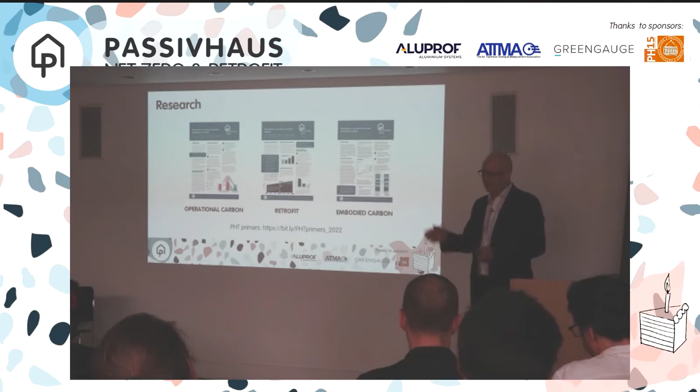This year has just been a bit mad. I don't know what you've all been like, but we have been so busy - it's been absolutely crazy. I've just picked out a couple of highlights from what we've been doing. These are 3 primers we've released in the last 6 months on operational carbon, on retrofit, and on embodied carbon. I haven't mentioned all the research work we're doing on specific detailing around steel frame, for example, the RIBA plan of works and how Passivhaus fits within that. Thermal bypass - we've got specific technical papers on all of those things running at the minute. It's just kind of relentless at the moment.

To follow on from that, in the autumn we'll be running large and complex buildings - so how does Passivhaus apply to large and complex buildings rather than the smaller scale things that many people start with. And then, of course, the UK Passivhaus Conference, which will hopefully return this autumn. That's also going to be a hybrid event.

So this event here today is a bit of a practice, because the conference normally gets 400 or 500 people coming to it, and that's going to be hybrid as well. Actually, it's a bit of a bonus this year in that the hybrid will allow us to hold the event outside the core cities. So we're going to Exeter for our conference this year - we're going to visit the St. Sidwell's Leisure Centre, the Passivhaus Leisure Centre. There will be site visits and training around that too, on the site.

But it's also going to be open to everybody online as well. So because we can do the hybrid thing, we think it's okay to go outside these very central locations of London, Birmingham and Leeds. So anyway, that's a good thing.

There's lots more I haven't mentioned on the education side as well. We're working with RIBA, for example, on building Passivhaus into all of their training for students. How would that work with architecture students across the country? We're looking at that at the minute, looking at how we build it into NVQs levels 4, 5 and 6, and how we get Passivhaus converted into that, plus detailed technical seminars throughout, as well as all the CEPH people going through the training, which we sometimes forget until they come and meet us.

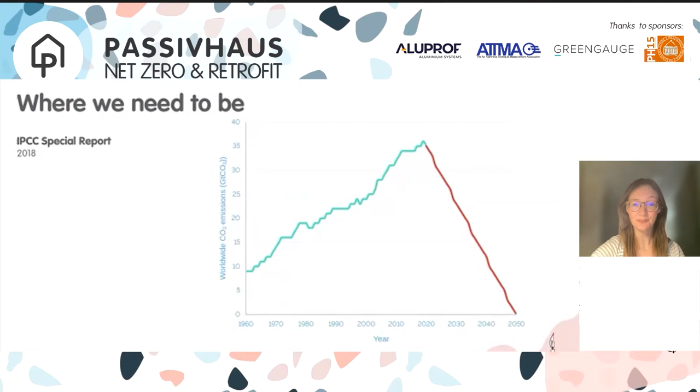Next slide, please. So how are we getting on with this steep downward trajectory that we need to be on? Well, if we look at the reality of this - this is the greenhouse gas emissions from our buildings - we can see, shockingly, there has been no discernible improvement over the last decade.

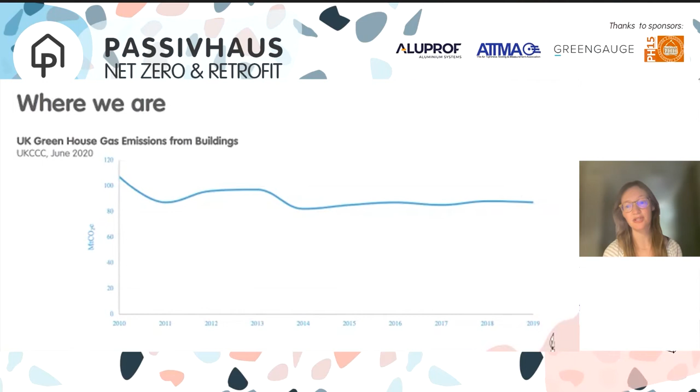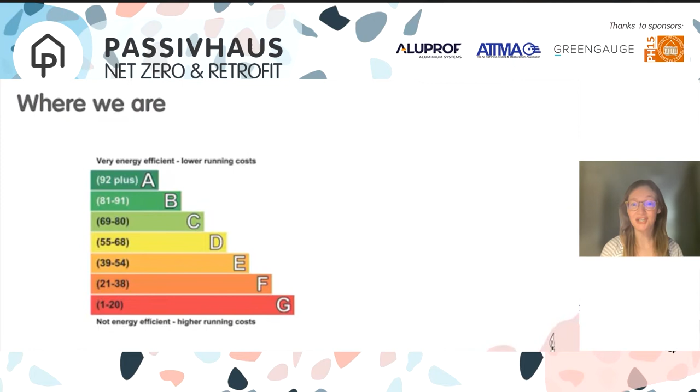But surely it's not all bad news - our devolved governments around the UK keep making incremental improvements to our regulations, so our buildings are becoming more sustainable. Well, not necessarily. This graph neatly illustrates the futility of using the building regulation EPC rating as a measure of energy efficiency. A better score does not necessarily deliver that better efficiency that it implies. We need a better methodology to deliver the improvements that we must make, and I'm going to make the case today for that to be Passivhaus.

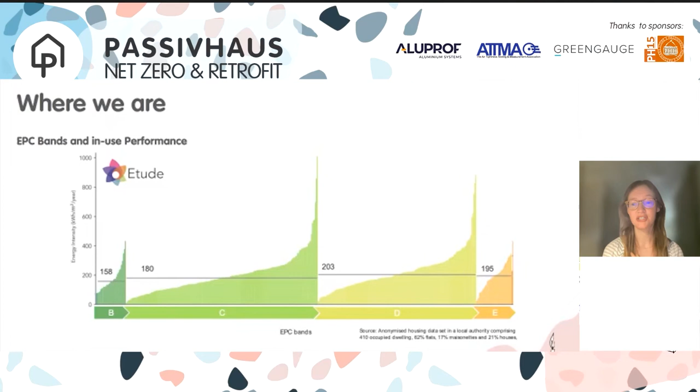So the kind of slow incremental improvements are not going to get us to where we need to be. The fundamental principle for Passivhaus is to reduce the heat losses so significantly that the building's heating demand can be largely met by the sun, the people, and the internal machinery in a building, with just a small contribution from the heating system. And of course, Passivhaus effectively eliminates the performance gap.

Importantly, this standard is for today, but it's also for the future. The same energy metrics have been in use more or less unchanged since the 1990s, such as the 15 kilowatt hours per meter squared per annum limit for space heating. This can be used to deliver to both the RIBA 2030 challenge, and it's also the space heating limit recommendation in the LETI Climate Emergency Design Guide. So there's clear cross-industry backing for Passivhaus levels of performance, and a recognition that this is the level we need to be at to get to net zero.

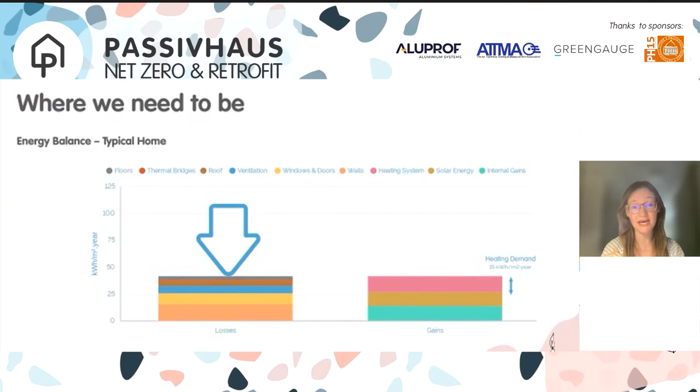Passivhaus is often assumed to be primarily an energy standard, as it does that part so well. And whilst it's true that Passivhaus delivers very low energy buildings, and helps us address the climate emergency, the standard also delivers much more. Benefits can be observed in terms of things like health and well-being, people performance, finance, as well as those broader societal effects.

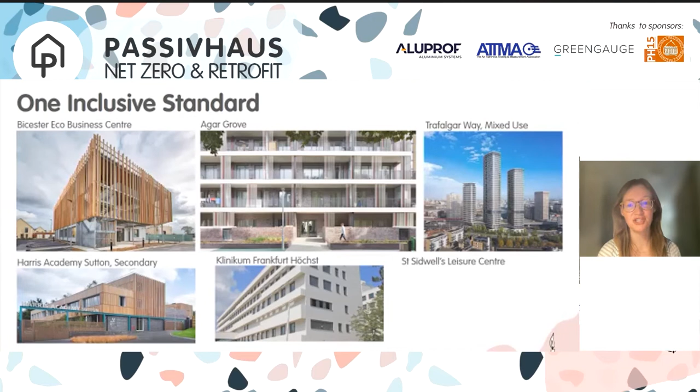So Passivhaus is this international tool. It's backed by 30 years of evidence. It provides us with a range of approaches to deliver new and existing buildings which are optimized for net zero. And this really is no time to reinvent the wheel. The tools we need to deliver on our climate pledges exist today, so we really must just get to work. The Passivhaus standard provides the solutions that we need in the UK to the hurdles that we have as a country of getting to net zero as a nation.

And of course, Passivhaus is no longer this niche standard for small one-off projects. There are over 7,000 units currently under development around the country. The images on this slide are just to give a flavour of some of the completed and projects underway around the country, including a range of building typologies from business centres and universities to swimming pools.

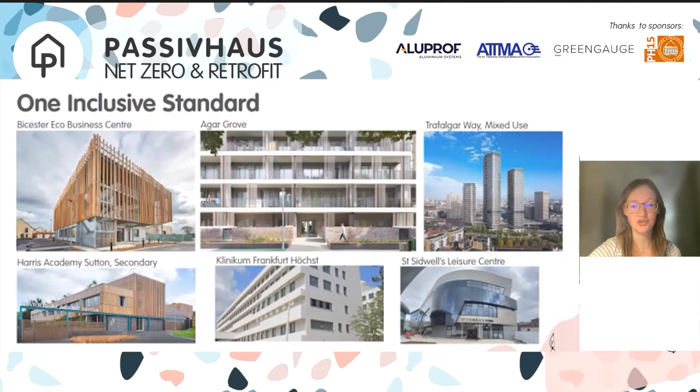John just showed you this, but if you want to see how Passivhaus can fit in with your net zero ambitions, we have this set of easy to digest primers covering, as John mentioned, Passivhaus and operational carbon, Passivhaus and embodied carbon, and Passivhaus and retrofit.

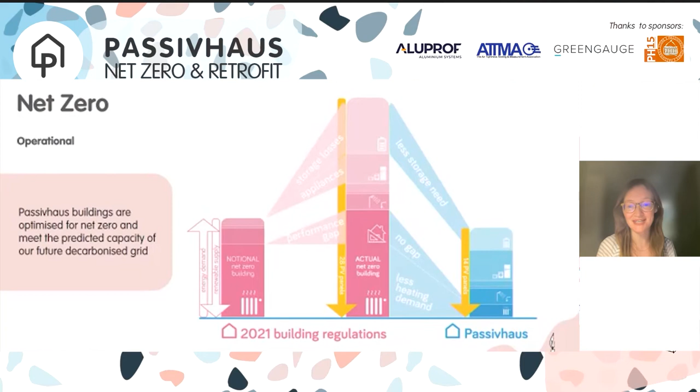A Passivhaus will have significantly lower heating bills than a typical new build equivalent.

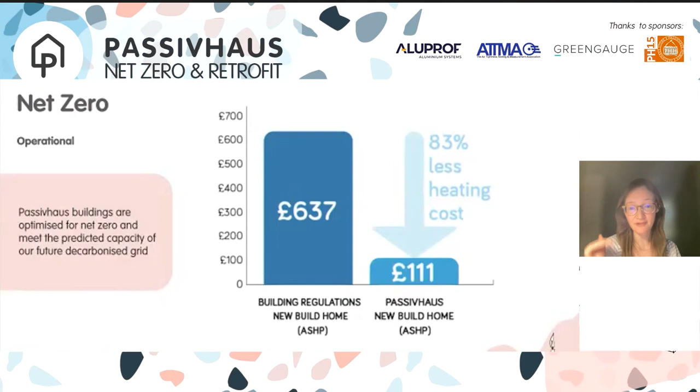In all the discussions we have as a sector around decarbonisation, it's really important that we do not lose sight of the huge number of people in UK homes living in fuel poverty, and the impact decarbonisation will have on those most vulnerable members of our society. Even before the current energy price crisis, over 4 million UK homes were living in fuel poverty. So it's critical that as we switch to decarbonised heating, we do it in a way that does not exacerbate this problem, by focusing on demand reduction and bill reduction as part of the solution.

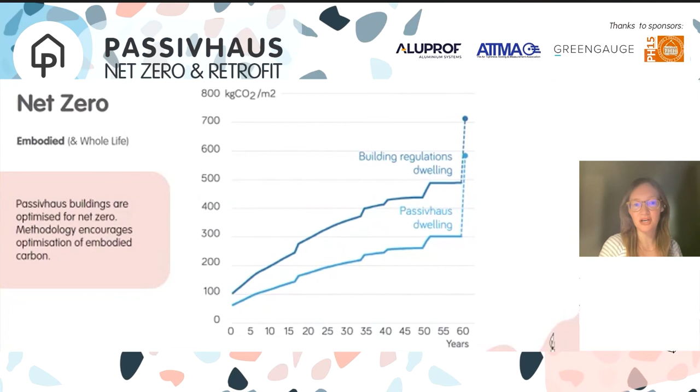You often hear queries like, what about the windows? But our analysis shows that extra pane of glass is insignificant compared to much larger embodied carbon concerns around structure and services.

Next slide, my second to last. I'm not actually touching on retrofit—it's in the second session—but it's so important to think holistically about our net zero future, not least to remind ourselves how important it is that new buildings do not add to the future retrofit challenge, as this is already plenty big enough. If we build today to the minimum building regulations, we're just creating a new raft of buildings to retrofit, at huge monetary costs to our clients and huge embodied carbon costs to the planet.

To get to net zero, we need to radically reduce energy demand and drive efficiency, which is what Passivhaus does. We cannot simply generate more zero carbon energy supply, due to the limitations we've just seen in the national grid—overall grid capacity, the peak load issue, and the demands for renewable energy from other sectors.

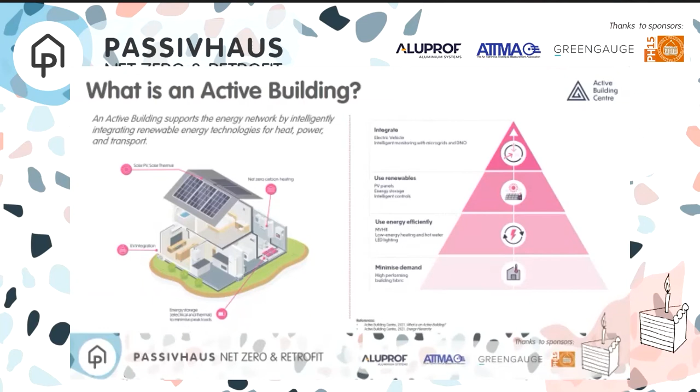So I'm going to present some of our case studies on what impact a net zero building can have on people and the climate.

So one of the case studies here is Marleigh, which is a private home development in Cambridgeshire. As part of the development, it's 1,300 new homes, private homes, in collaboration with Hill Marshall and PTE Architects. As a planning condition, the council required 5 pilot homes as part of phase 1. Active Building Centre was involved at RIBA stage 2, where we supported the architects in establishing how they can approach Active Building Centre principles and include those in their building.

We supported with the feasibility study of the 5 active homes, and we helped them in procurement of the different technologies needed to deliver an active home.

You can see an impact here of what it does for us. A standard build is one where you build to the current Part L regulations. A baseline design is, since it has 1,300 homes, the rest of the homes have to be built to a certain standard, which is still better because Cambridge Council has their own regulations. But if you build it to active home standards, it's a 64% improvement on a standard build - it's not net zero, but when you're working with a big house builder, you have certain challenges which we are still struggling to collaborate on and deliver those buildings.

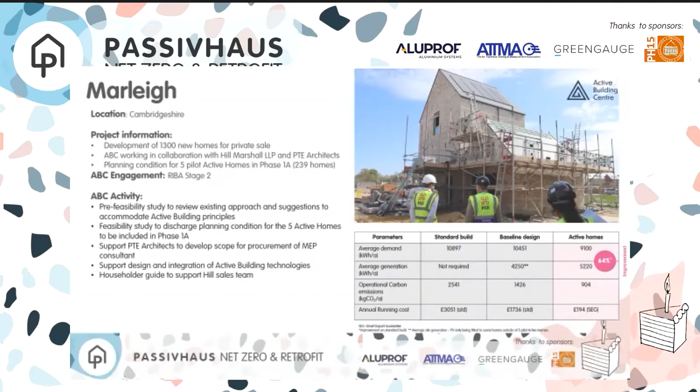But then there's another difference in the social housing example, working with Flintshire County Council in Wales. Here we were involved from a very early stage, and we were able to do dynamic simulation modeling at RIBA stage 2. When the client came to us, they just had a concept plan, so the impact we could make from an early stage was great, which shows in our results, even though it's still at planning stage.

It shows that if you do the right things from the beginning - reducing the demand, changing the orientation, and maximizing the PV generation on the roof - it can get down to 124%. Because it's whole social housing, there's no need for air source heat pumps, since we followed the passive house approach. So these are going to be certified passive houses.

The heating demand for the homes is nearly 5 to 7 days when they really need to turn on the heating. So we did not need any air source heat pumps, and they're going to meet that with just infrared heating. That shows on the operational carbon emissions, which is negative, better than net zero.

That's what we hope they're going to be. We are going to take more detailed analysis at later stages, but still at planning, we were able to do dynamic modeling. And the running cost is -100 because the users are able to share and exchange with the grid. That shows what an impact you can make on a building if at the right stage with the right design and the right approach.

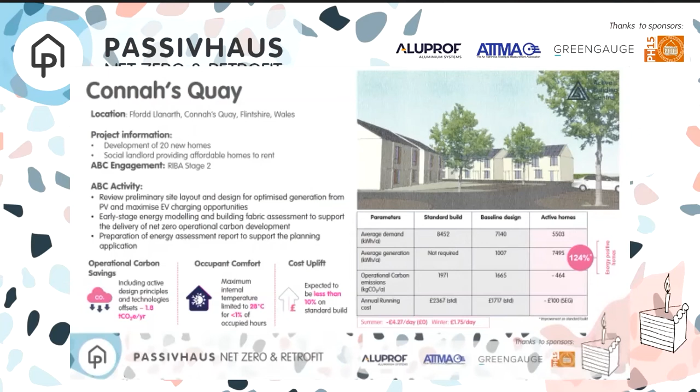And this approach not only applies to domestic buildings. This is another example of a non-domestic building where we are applying the active building approach to industrial buildings, in collaboration with Carmarthenshire Council and Welsh Government, where we are building 3 non-domestic industrial and office blocks.

The target here was achieving RIBA 2030 climate challenge. And it has been a challenging project. I wouldn't say it wasn't, but we are getting there.

The highlight for this project was, since this building is going to be monitored 5 years after it's been constructed, the contractors are going to be held accountable for what they've delivered. So that was the driving force behind it, because we can hold them accountable for what they have delivered.

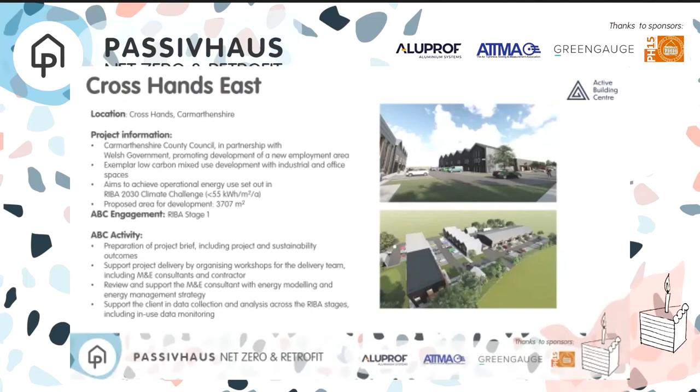Concludingly, this is what we work on at Active Building Center. It's comfort, carbon, and cost. It's a balancing act which you cannot achieve all at once - to achieve one, you cannot compromise the other.

So this example shows the overheating analysis that we did for a non-active home. The building was overheating and the maximum temperature was reaching about 40 degrees in summers. That's what a standard UK Part L regulation build will do, because you're just supposed to comply with SAP calculations. That goes to highlight that we are not doing enough at this stage.

Even with the new Part O overheating assessments, it's still just for non-domestic buildings that you need to do dynamic simulation modeling. You don't have to do any sort of dynamic modeling for residential buildings, and this is a residential building. So there's a very high risk of potential overheating in those homes with future weather conditions, and you know that's going to be there.

You're going to have extreme weather conditions in the future, so we need to future-proof our buildings. You can see the impact that we can have. This is the calculation done for a standard 3-bed home of 74 square meters in the UK. If you follow a non-active home approach, the Marleigh pilot approach, where we had challenges and weren't able to maximize the roof generation, but in Connah's Quay, where we were able to maximize the roof generation and meet the demand, there was a 103% improvement on standard build.

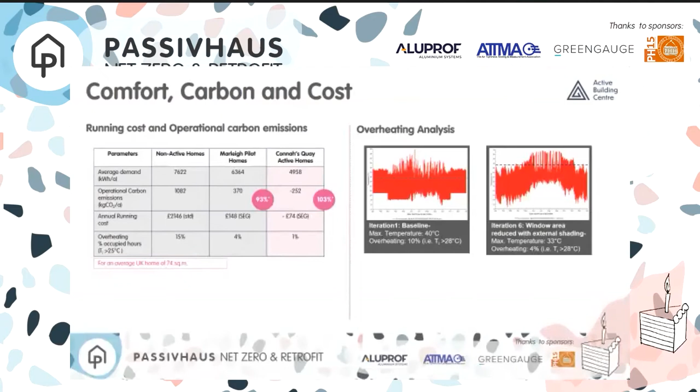Great, thank you, Pragya. So we've heard about efficiency as the first renewable, and then we've heard about on-site, on-building renewables. And now we've got David Adams, who's going to tell us about what some of the major house builders are doing or hoping to do on this approach. So David.

Thank you, John. I guess you're probably sat there going, oh my goodness, what's a main house builder going to say after that? Fantastic presentations, really appreciated. This is my second hybrid event, and by the looks of it, the slides work. Just to be safe on this one, I thought I'd cut out the middleman and not have any slides, because I was told after my presentation last time, no one could see the slides, they'd all wiped out. So there are no slides, you've just got me.

I'm kind of notionally talking from a Future Homes Hub perspective, more from my own personal perspective, but I am working with them. From my background, I used to work and set up the Zero Carbon Hub. I was keen to engage, but do not quote me as this is the house builder view if you'd like me to live.

I'm also conscious that, you know, you guys do a fantastic job. You really are pushing the envelope, and you see me as a main house builder. And the main house builders see me as a green person pushing, so you both hate me.

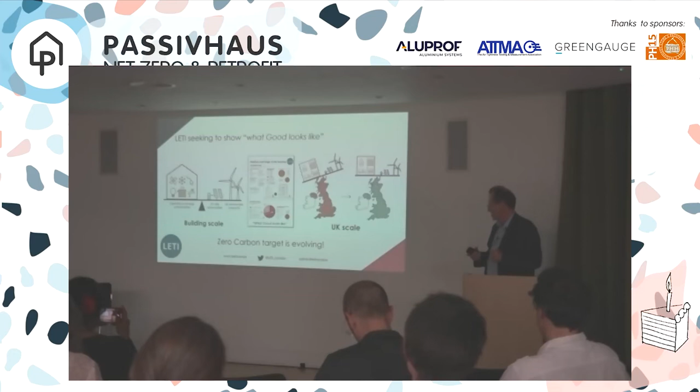What we realized pretty early on was that zero carbon is changing. I was involved in the BedZED project 25 years ago, and we were on the far left, building level zero carbon. We're now working at a UK scale - we heard this implied earlier on in that debate - and we have transport, industry and a whole set of other things to be involved. What I want to do is give you a little heads up as to how that potentially changes where we need to go.

The climate emergency guide we produced tried to set targets as to what was appropriate, looking at top down and bottom up - how much renewables, green energy we could produce, and divvy that up between industry, transport, buildings and so on. Lo and behold, it came remarkably close to Passive House for new build, but there wasn't one mention of Passive House in the document because we're trying to be impartial. But that is the kind of level we're looking at - not least of all, working from the bottom up is pragmatic. And as I mentioned to someone earlier, you also have a 20% cost benefit because there's no VAT. Therefore, why aren't we doing it?

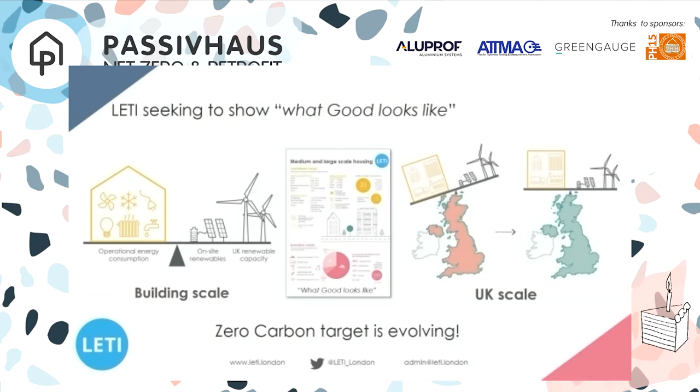Retrofit, on the other hand, is a different ballgame. Retrofit Part 1, for which we're very grateful for people who have come out supporting it, looked at what best practice was, looked at processes, looked at things you have to consider, the need to look at it holistically and so forth. But we knew when we were doing it, we were circumnavigating certain difficult issues. So although we've set a standard, we've established a best practice which loosely speaking aligns with AECB at a certain level, but is very clear on what you need to do to try and achieve that.

So it becomes less of a black box. And for that reason, we're beginning to see LETI guidance coming into planning policy as a clearer direction because it appeals more to a wider audience. But those elephants in the room—it did not align with where the UK was going at a top-down level.

The Committee on Climate Change, now renamed the Climate Change Committee, in their sixth carbon budget, state the energy efficiency needed of our total building stock is 12%. That's it, nothing else. It's far cheaper to build those wind turbines mentioned earlier, and that's reflected in their diagram on the right here. The energy efficiency is that much, and heat pumps, which are using that grid and renewable supply, are picking up the lion's share.

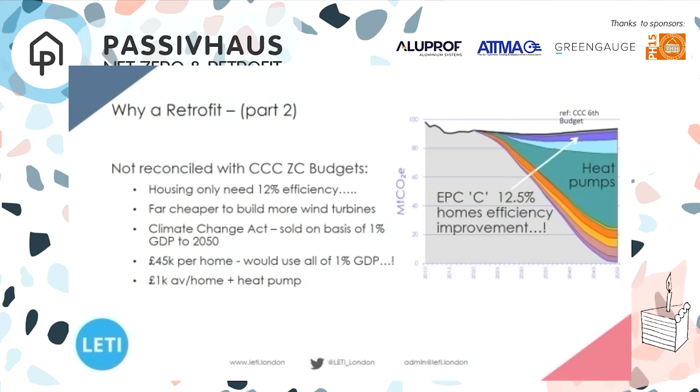Our best case study in part 1 was 60,000. It doesn't work. In fact, the CCC has £1,000 per home on average, plus a heat pump. I paraphrase, but that's basically what our research has identified.

So we then started at this retrofit Mark II: how many, how deep, and for what cost? The nitty questions. So we wanted to identify shortfalls in the straw man which the CCC has put up—as mentioned earlier, issues of fuel poverty, top down, meeting the cost limits and so on, PAS 2035 compliant and occupant responsive, because we didn't feel a lot of what was out there was responding to what occupants were telling us were their priorities.

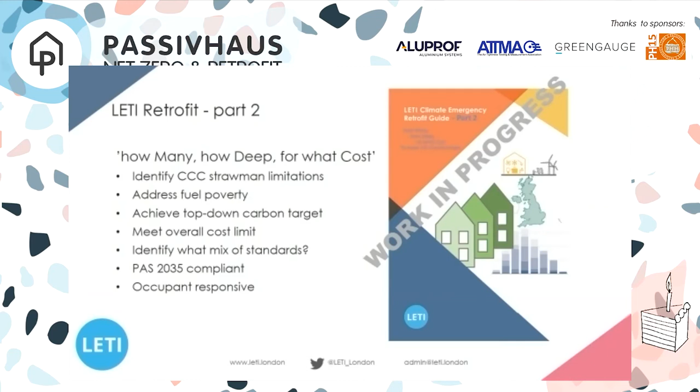This is only a draft, but the image here is significant. There are different shades within the answer.

I'm not going to go through this, but if you're trying to manage a work stream of 80 people, you're looking at CCC interrogation, fabric, systems, cost, trying to integrate those, a stock model which John Palmer put together for us previously at Passivhaus Trust, how to get to zero carbon for zero cost by 2050, and the social aspects. Try managing that process.

This is roughly where we think the numbers start to come out. Enerphit, and I'd put Energiesprong roughly in the same kind of level, although it's not judged in the same way because it's a cost model, between 10 and 20% of the market. I'll be interested in whether you think you can ramp up to that level, because that would feed back into that process. I'm skeptical.

LETI best practice, about 25%. Historical buildings, the remainder—we think we can shrink that to about 1% or so of the market. And the remainder, we think we need a new standard, and we're calling it LETI Basic.

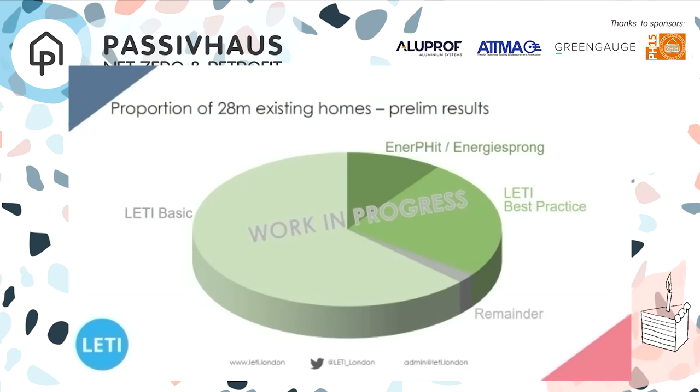I'll go into that in a little bit of depth, because I know it might grate with some of you in this room. In essence, we've taken feedback from people—certainly I had an involvement in the Green Deal and so forth. Single point of contact: we don't want dozens of people turning up. Keeping the front facade: we made an early decision we weren't going to touch the front facade. And what we did was we took this archetype far deeper than we did in retrofit 1, because we wanted to apply an awful lot of extra thinking that would not normally get applied to an individual dwelling.

So, front facade, looking at lack of space. Forget that hot water cylinder for an air handling unit for the air source heat pump—it doesn't work. And various other things within that.

We came up with a way of doing LETI Basic, and then a way of progressing, if you wish to, onto higher standards with the various different levels we're looking at for costs. I'll come to that in a moment.

I'm not going to go through this in detail, but we are going for MVHR, and I'll offer you just a little taster. If you go for 80% efficiency as opposed to 90 or 92%, the price comes down from 1,600 quid on a good day down to 450 quid. It's cheaper than demand-controlled extract ventilation with those trickle ventilators.

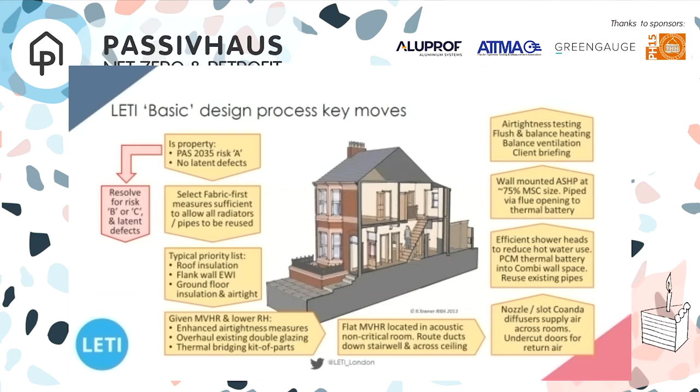There's also other things to do, how we want to replace the boiler with the thermal store, phase change thermal store. You want to retain all the insulation, the heating system. That means fabric first. The objective is make sure you don't need to touch the heating system, other than replace the middle of it.

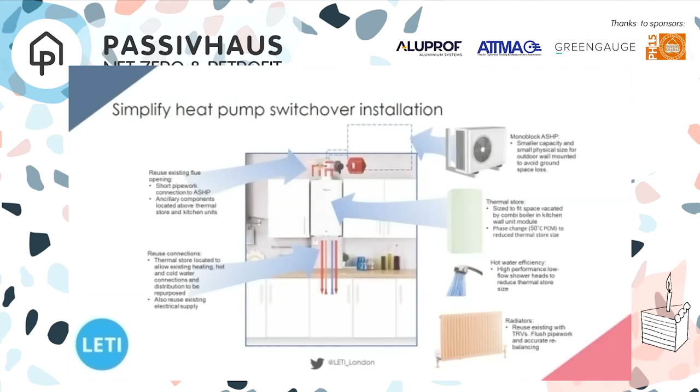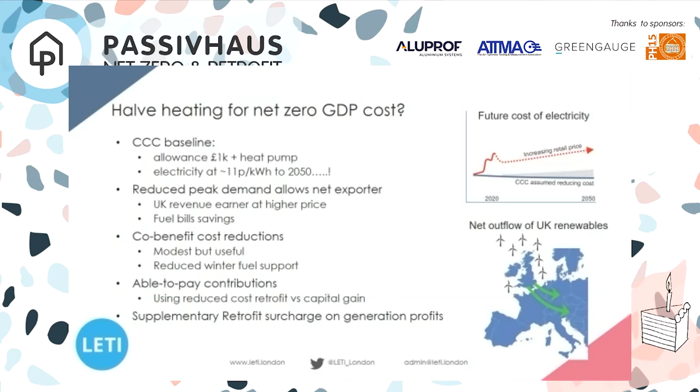And there's various other things to finish. We're also looking at a supplementary retrofit surcharge on generation profits. This is exactly the mechanism which happened for gas in the North Sea. It gushed out of the ground, and they sold it at world prices, so the government then took a slice of profit. We won't be able to use all of that because Treasury will be looking to replace their tax on petrol and things like that, but we believe there is something there we ought to be looking at because of fuel poverty and so forth. That's a snapshot.

I'll leave you with a summary. We're looking at roughly halving heat demand at zero extra cost, a mix of different standards. And yes, we'll need some new products and a new way of doing things when it comes to interventions in your typical house. And by the way, there's a Retrofit for the Future guide coming for non-domestic shortly. Watch this space. Thank you.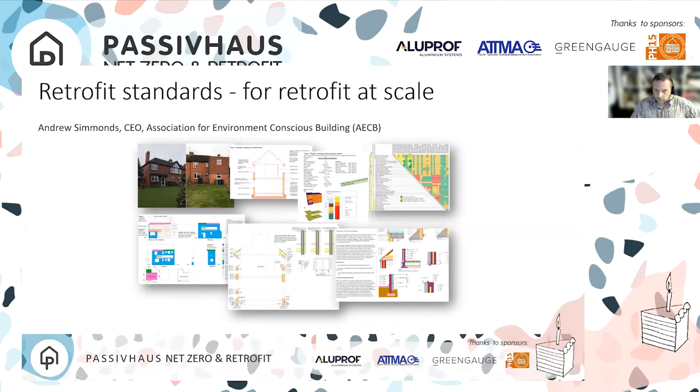We've got a small group, that's Alan Clark, Sarah Price, Gervais Manguano of Waxwing Energy, Mark Siddle, and myself. We basically convened this group because we wanted to rise to the challenge of those people who've been criticising those people who they perceived as over promoting the benefits of deep retrofit, particularly when it comes to understanding whole life carbon and so on. So we rose to that challenge and took on a bit of research.

A bit of background, AECB's got 1,800 members at the moment, which is good. It's going up. And we've got quite a few students joining as well, which is always good. We've developed 5 standards to date. We have the building standard, which is for new build. This is a self-certification system based on the Low Energy Buildings database. We have the retrofit standard, and there's information on the website on that. Where I've put full fabric retrofit, that really just describes what the current standard is. And what I'll be talking about in the next few slides is what we might call a heat pump retrofit or a light retrofit.

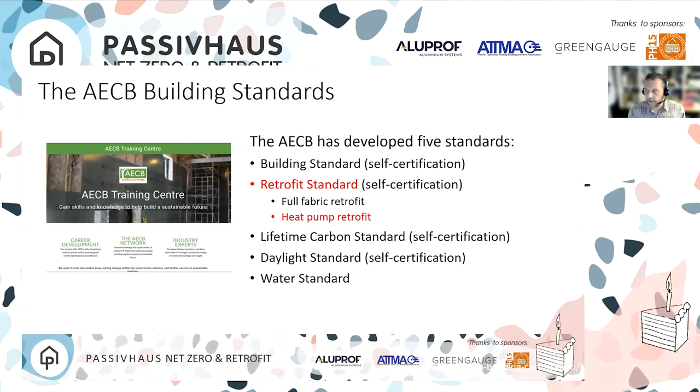We have a lifetime carbon standard, which is really just getting people to use a carbon accounting tool, PHribbon specifically, in order to compare and contrast construction assemblies as part of their work and encourage them to move towards lower embodied carbon forms of construction. There's a daylight standard, and there's a long-standing and under-promoted water efficiency standard.

So where the current retrofit standard, the full fabric retrofit standard, sits is here on a graphic I borrowed from LETI. You can see the AECB standard there is at 50, typical new builds about 85, and then you can see the existing stock there, the sort of space heat demand represented across all those different building types - flats, mid-terraces, semi-detached, and so on.

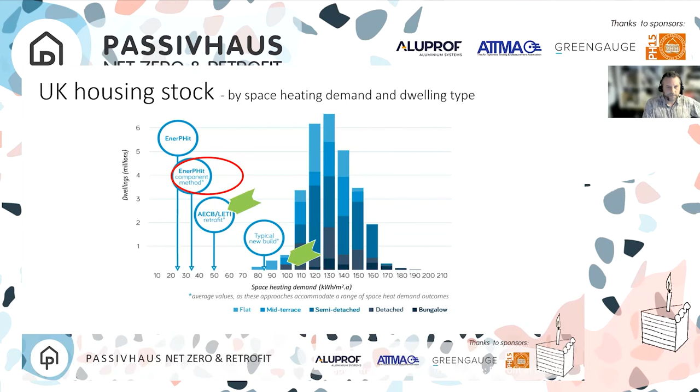Okay, so this is draft. This is where our small working group has been considering how light a fabric retrofit is needed in order to meaningfully and usefully retrofit a building. So key criteria to achieve this standard are: we do require a whole house plan and an energy model that goes with that.

PHPP, the Passivhaus methodology, underpins all of our standards, but we're thinking we will allow SAP-based energy models for this new standard. If I call it the step 1 standard and call the full fabric step 2, that's maybe a bit clearer. So for this new step 1, we require a whole house plan and an energy model. The idea of the whole house plan is that, as and when a deeper retrofit is subsequently needed, nothing done in step 1 will block later measures if they're needed.

The whole house plan is intended to show how the full AECB standard would be achieved in the end if it was implemented. This standard, step 1, is focused specifically on moving off fossil fuel heating systems and onto a heat pump. We require at least cost parity to be achieved, so there's a question as to what you have to do to achieve cost parity with gas, oil, or whatever fossil fuel you're coming off. We think the criteria below will be key to help people achieve that.

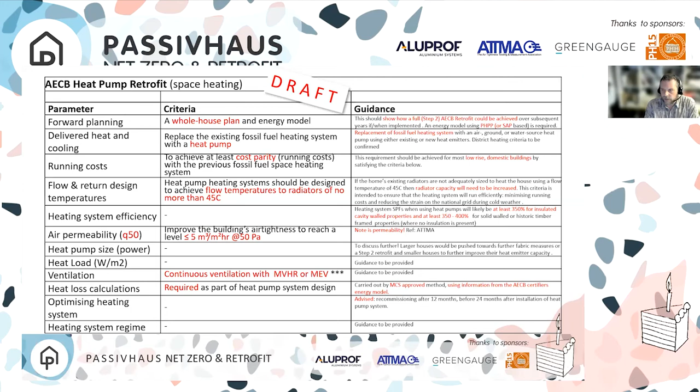Heat loss calculations are required as part of the heat pump system design. What we're looking to do is require certifiers to pass on some of the information from PHPP to the MCS approved people doing the calculations, to try to bring those outputs closer together. The rest will basically be guidance. So that's where the draft outline of the new standard is looking like it will sit.

We've been modeling this at individual house level, and we've also been using the AECB stock model, which we worked with John Palmer on, where we compared the outputs of our stock model with his stock model, a bit of cross-checking.

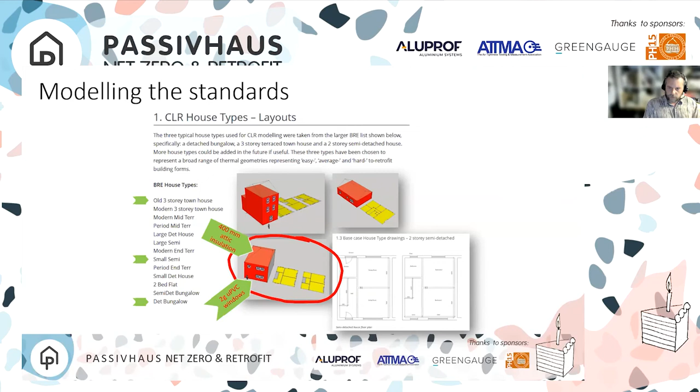We have three house types, which really are form factor types: a semi-detached house, a bungalow, and a mid-terrace house. They represent poor, medium, and good form factors. We have a series of PHPP files where we've looked at each of those three house types, played around with measures and heat pumps, and looked at what happens in different situations. We also have versions of those files for cavity walled houses and solid wall houses, to look at whether solid wall houses stand a chance of achieving the standard as well.

This is just a snapshot of an output - a typical cavity walled semi-detached house. It's assumed to have not very good cavity wall insulation, and the attic insulation has been topped up to 400 millimeters, and it's assumed to already have double glazed plastic windows. A typical cavity walled house.

With a seasonal performance factor, or seasonal coefficient of performance, for the heat pump of just under 3.5, you get to about cost parity with a phase one, step one retrofit. And you can see, roughly speaking, that reduces the space heating demand from the original house - which might be a whole house temperature of 17 degrees in the heating season - from about 16,000 kilowatt hours down to about 4,000, because of the efficiency of the heat pump.

Step two, by comparison, full fabric retrofit to the AECB retrofit standard will bring the space heat demand, the energy consumption, down to a much more reasonable 1,400 kilowatt hours. So just to give you a sense of scale of what we could achieve with the different interventions.

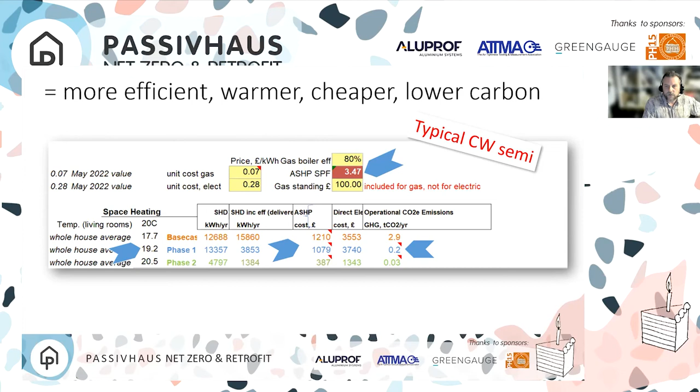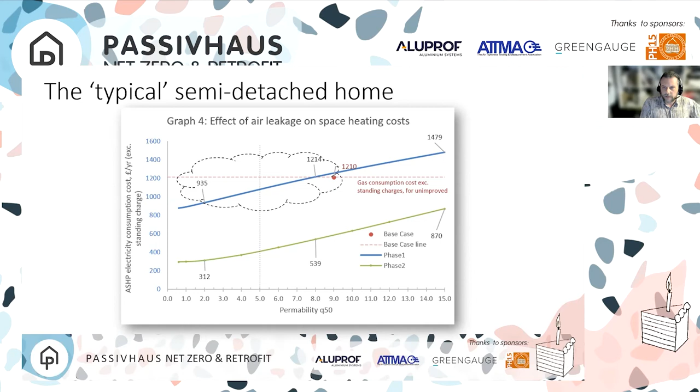We also looked at the relationship of permeability - how important is improving the air tightness of existing buildings at scale? We looked at the cost of running the heat pump compared to the cost of heating the house on gas. Across the different house types we were looking at, we felt an air permeability of 5 is a reasonable target to aim for. It does save money the more airtight it gets - ideally you'd aim for 2 or even 1 - but we thought 5 was potentially practical, and it would help people achieve cost parity.

Now, carbon. There are two types of carbon we're concerned about: embodied carbon, lifetime carbon - particularly the carbon burp, the cradle to practical completion - and operational carbon as well. We mustn't forget that. So for context, National Grid, as Chris mentioned, is decarbonising.

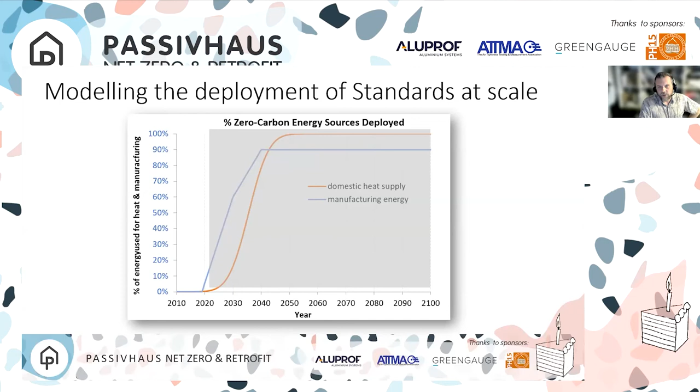You have to make some assumptions. You have to assume that the domestic heat supply is decarbonising - we talked about that. You also have to assume or decide how manufacturing energy will be decarbonised. So we've looked around a bit and created a not unreasonable but ambitious decarbonisation target over the years for manufacturing energy, and that you can change in the model.

Now, the other big factor is how many retrofits of what type happen when. So Tim Martell has recently taken some scraggy sketches I sent him and adapted our model to help us understand, to nuance it a bit.

So for example, what we're showing here, on the left-hand side, you have the number of retrofits carried out per year, with time along the bottom axis. We can create whatever scenario we want here. The one you're looking at just happens to show a lot of step 1s - a lot of heat pumps and light fabric retrofits - being done between now and say 2040.

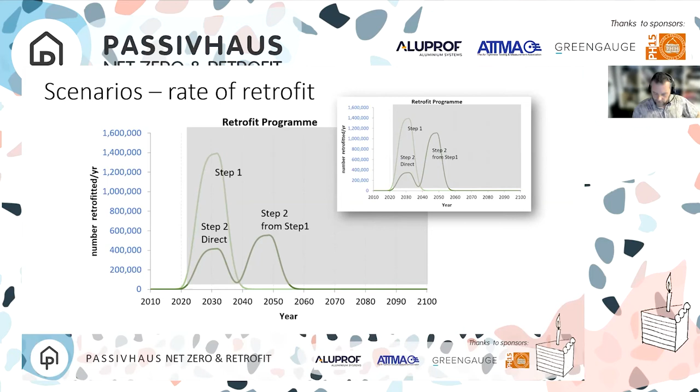And at the same time, maybe housing associations want to deal with fuel poverty a bit more robustly by doing full, deeper fabric retrofits, step 2 direct retrofits. And then in later years, as I said, the second wave of retrofits might be turning step 1s into step 2s, deeper retrofits.

This slide describes what all of that looks like if you turn that into transforming the stock. Everything under the horizontal line is existing stock being transformed into different types of retrofit. The solid orange line is a reducing number of untreated houses, and the two green lines are different balances between step 1s and step 2s. It also reminds us that we have notional targets for new house building, which is adding to our emissions. In this scenario, we've said what happens if all new homes are either AECB building standard or passive house, shown as the blue and purple on top, adding to the emissions.

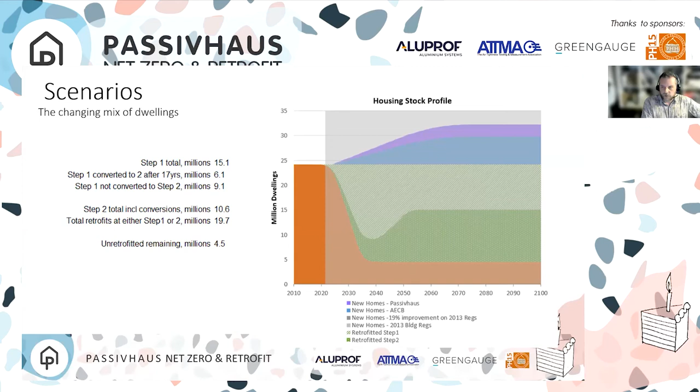So that ends up reporting to two graphs here. This is consumption-based emissions, not territorial emissions, so this may not be the same language that governments speak. What we've done is added up operational and embodied carbon. You can see there's a peak from a big burst of retrofitting work, a carbon burp, but it is basically reducing operational energy. Although embodied carbon emissions do add to the total, it's important, but not a deal breaker.

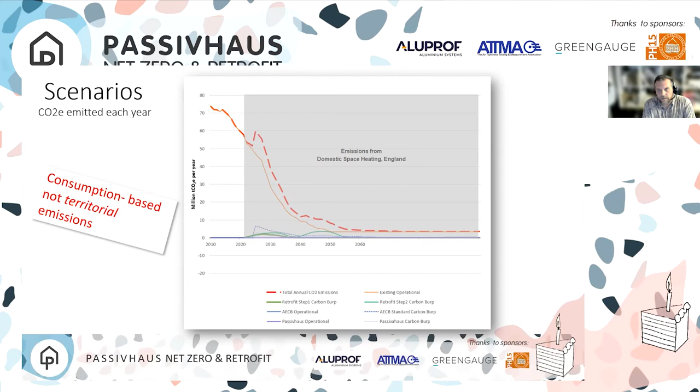This last graph adds up all of those things and shows it as cumulative CO2 equivalent emitted from the housing stock from operational and embodied carbon. What you want to do is flatten that curve, because that means we are not adding more CO2 to the atmosphere. Of course, that's probably going to be impossible to do, so the flatter the curve, the better.

That starts to bring in conversation about carbon budgets, how much net is in the net zero, and what we need to do to offset those remaining emissions. Whistle stop tour, there we go.

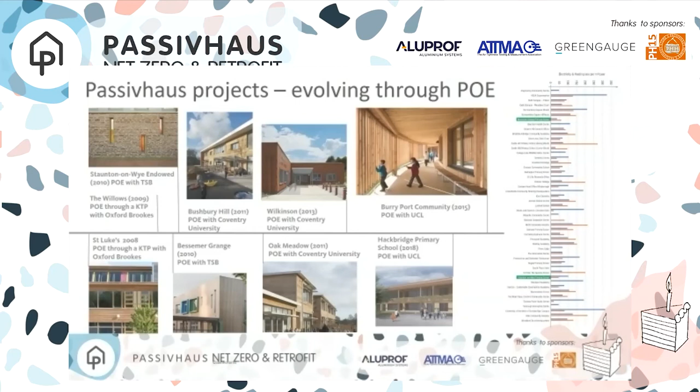We have a sister consultancy that sits alongside, and we find there's an increasing amount of work out there in terms of trying to help clients navigate their way through what really net zero is, what that process is, and how Passive House might fit into it. We've delivered a range and scale of different buildings in different sectors, so we feel Passive House is applicable to any building. We do a lot of post-occupancy evaluation of our own buildings, but also others, which has been particularly interesting in leading us down the retrofit route with this particular client.

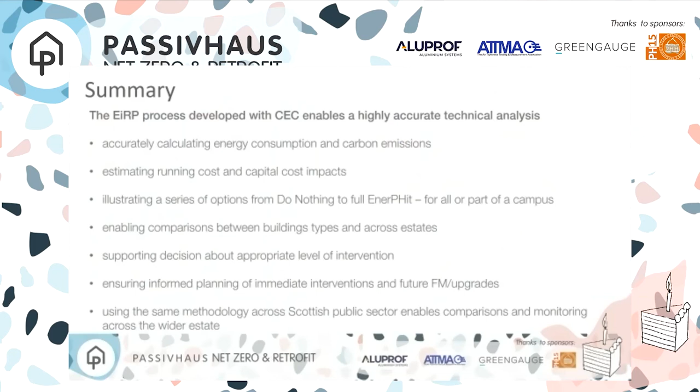So again, the new PHPP 10 and the additional issued criteria on EnerPHit does allow for certain exemptions. The particular focus of the client we had, City of Edinburgh Council, was around how do you retrofit or apply EnerPHit principles, or full EnerPHit, to a heritage city, a city with heritage value, across an estate of non-domestic buildings.

So the focus of this presentation is non-domestic buildings in nature, education and office buildings. We worked with our asset management team to establish what that profile of building looked like.

Where do we start? We have all these aspirational standards, studies, and hypothetical modelling scenarios. But what Edinburgh wanted was to get under the bonnet to see what this physically meant for their work stream, how they could put any capital budget to it if it was viable, and how it actually started to affect their buildings.

So it's an ongoing conversation. It hasn't concluded, because it's such an extensive conversation beyond the immediate client stakeholder we work with. In relation to looking at eras and types of construction, we carried out various studies and worked out the different trends.

We were able to isolate and develop a methodology for Edinburgh, bespoke to them, applying the PAS 2038 methodology, taking lessons learned, and looking at building characteristics as a real driver for what type of EnerPHit or retrofit project you can take. This involved an overview study of 400 buildings, 300 of which are conditioned.

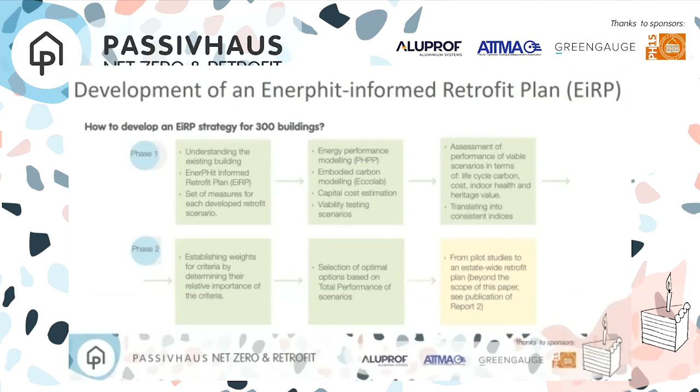We narrowed that down with the asset management team to 2 pilot deep dive studies out of a group of 12 buildings they felt were representative of their general estate. Of course, there are huge abnormals with some very high heritage value buildings in Edinburgh, but this was extrapolated out to give a series of conclusions for them to apply from a cost and measure-based analysis across the rest of the estate, which is still an ongoing conversation.

Because we're already sold on EnerPHit and Passivhaus, we're delivering new build Passivhaus schools - that's not the message you need to tell us. We just need to know about the factors to allow us to go back to the political side of the client decision-making process. So broadly similar to some of the other scenarios mentioned today, there were 4 or 5 different intervention scenarios identified.

Option 4 being fully certified EnerPHit, either by component or certain exemption-based, certain exemptions based on the heritage value. Middle of the road, which is looking at MEV, maybe slightly more relaxed air tightness, and various bespoke, decentralized, centralized, or MEV ventilation options.

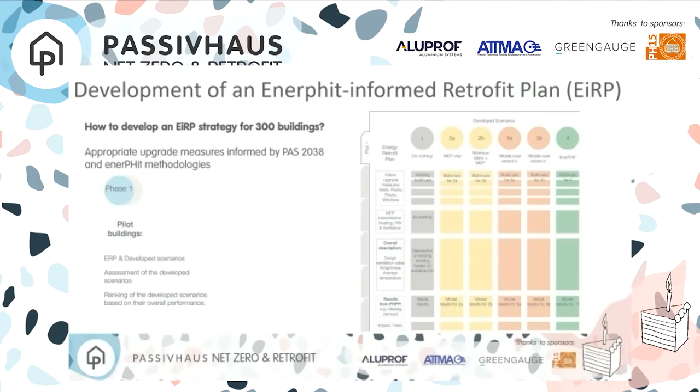What this also covered was very much a deep dive, so this wasn't just a light touch feasibility. We really got to grips with the buildings in terms of air testing, thermal imaging, and opening up works.

The 2 buildings on the left-hand side that we chose - one was in an architectural conservation area, going to have a much more internally insulated approach for the whole process, and the other, a 1970s prefabricated building, easy to strip back to start again, retrofit from the outside.

The PHI outPHit project happening at the minute is about deep EnerPHit certified projects in Europe that don't disrupt the user, because these are educational buildings, not just housing. So we have limited 6-week windows in the summer to try and phase these works over a period of time.

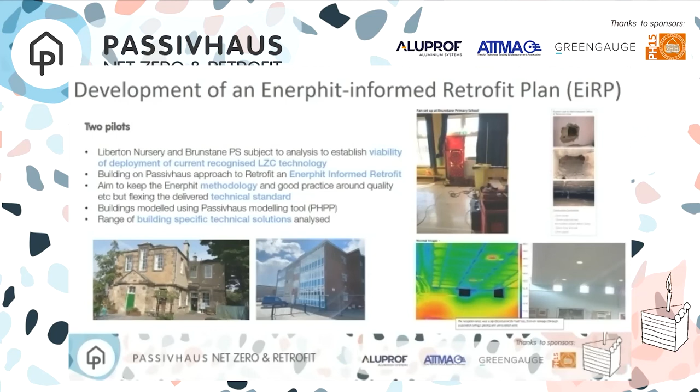That drew out all the usual things around terrible air permeability, thermal bridging, et cetera, and also modelling those buildings accurately against several years of cost data from those buildings as well.

Using John Parma's tool around the temperature reduction factor, when looking at different levels of retrofit - the average temperature of an existing building isn't 20 degrees all year, it's actually more like 13 degrees - and how retrofit measures can improve that average temperature over time.

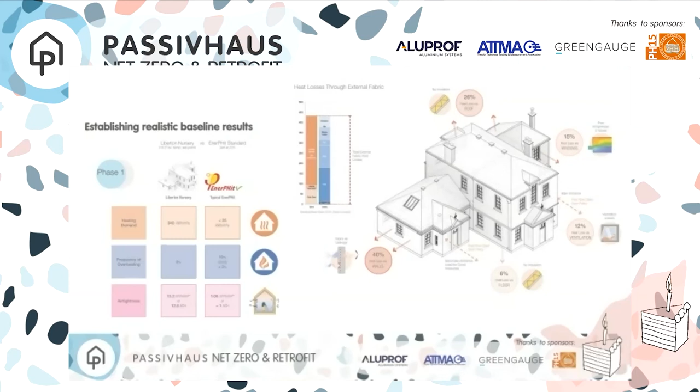So a baseline was established. There was an assessment done on all the deep dive work that came from the pilots itself, and a series of measures were applied to the building. You can see from the first 2 bars on the left, just because it's all a bit small - one is obviously MEP only, which we know doesn't deal with demand reduction, and that's what Edinburgh are interested in.

Their actual local infrastructure to the city is at or almost at capacity, so the idea of throwing a lot more kVA demand on the grid, they're aware that this wouldn't be the first choice, which seems to be the government's first choice at the moment.

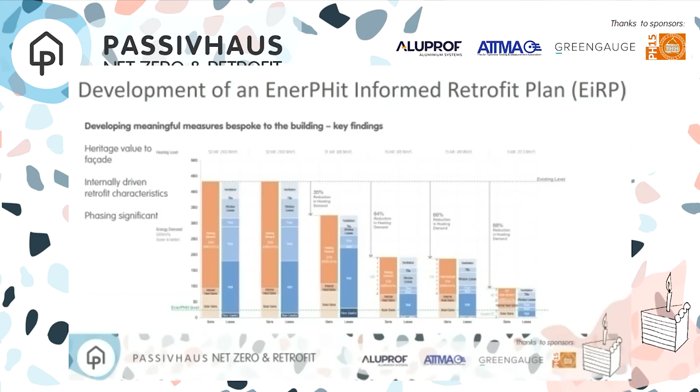And we looked at a series of interventions, so it's not that we discounted certified EnerPHit by heat demand on this initial listed nursery. We went with a component method or heat demand method with exemption, recognising that we couldn't put 250mm on the outside of this building given the harm and significance that would cause, and how this would realistically work in real life. You can say you can put a cosy insulation on listed buildings, but we can establish that's not really the case going forward. We worked with Harley Haddow, the M&E engineers, to do a deep dive into this study.

Not just give us a heat demand and size of heat pump, but actually go into detail on sizing and type of ventilation system. As the heat pump design got smaller, the ventilation system obviously gets a bit more complicated, and we were trying to comply with BB101 because indoor air quality was another real brief requirement of the client in this case.

But the really interesting thing, for the heat pump lovers, was that without doing the fabric, if we just stick a heat pump into this school, we go from having 19 radiators to 77 and a massive buffer tank outside, with no space for learning and teaching. So we're actually creating a dysfunction in the buildings by just decarbonising it, especially in the non-domestic context. Of course, as we address the fabric, we come down to maybe 12 radiators, so we're actually gaining that extra bit of space for artwork for the 5-year-old or whatever.

We looked at various incremental assessments across that, also with the fabric, but we felt M&E really is important in this as well. What we don't want to end up with is another kind of white elephant in terms of a heating trend. We want to make these buildings independent of those heating trends as much as we can.

Won't go into carbon in too much detail because I don't have time, but on the left-hand side I'm broadly in agreement with what Andy's just presented. The change from gas to electricity helps massively with decarbonisation, but demand reduction is also built into that figure. So the overall carbon burp, as Andy described it, exists, but over a 60-year profile is much, much less significant than it would be otherwise.

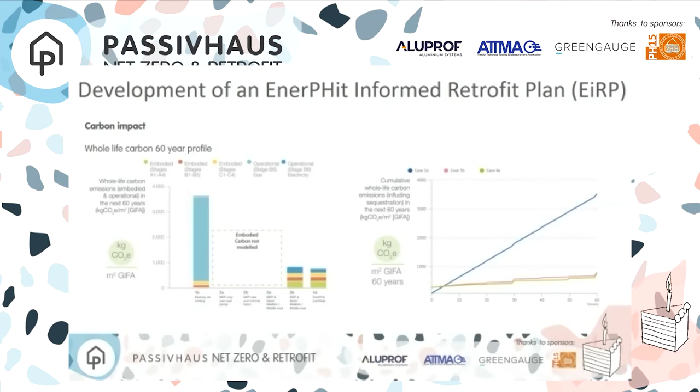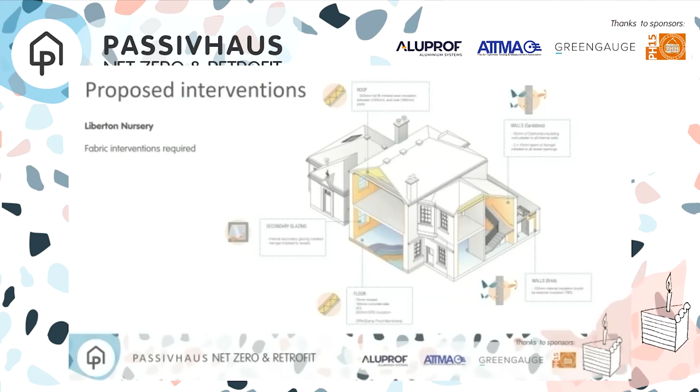Again, trying to visualize this for the client - how can a client understand these measures? We're trying to take that criteria and all these modeling scenarios into impactful reality to do with phasing, moving and consulting with stakeholders and users of the building, and what that means for retrofit for both types of buildings. It was much easier to get a building like this, with a horrendous form factor and lots of complexity, but actually much easier to detail and strip out. And it was also bigger.

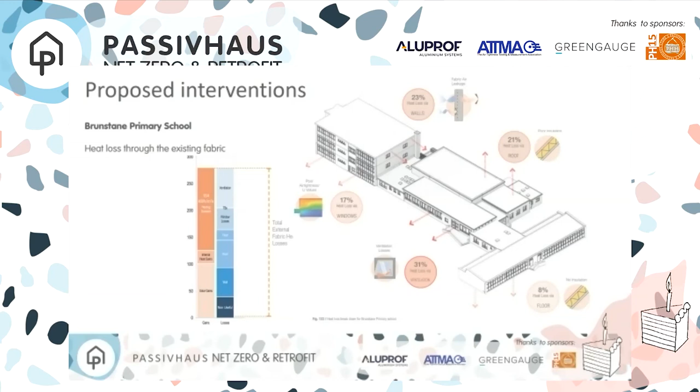So from a cost per metre squared perspective, looking at energy use intensity across the 300 buildings, it's going to lead to investment in certain areas to do with heritage value as well as cost per metre squared, because capital cost is linked into all this as well.

Again, similar story here in terms of demand reduction. We also looked at a series of tables and profiles around annual operational costs over 30 years, and current capital costs, which are now 30-40% out of date because they were done eight months ago. But even just installing a heat pump only was looking at £630 per metre squared at that point for that building, a 320 metre squared building. And as we came down to fully certified EnerPHit, we were looking at less than £3,000 per metre squared, which interestingly sits below the new school building metric for Scottish Futures Trust funding, which Sarah referred to earlier. So we were validating that actually the cost of deep retrofit is less than the cost of a new build school, and again just parameters in terms of what their criteria and risk was aligned with as well.

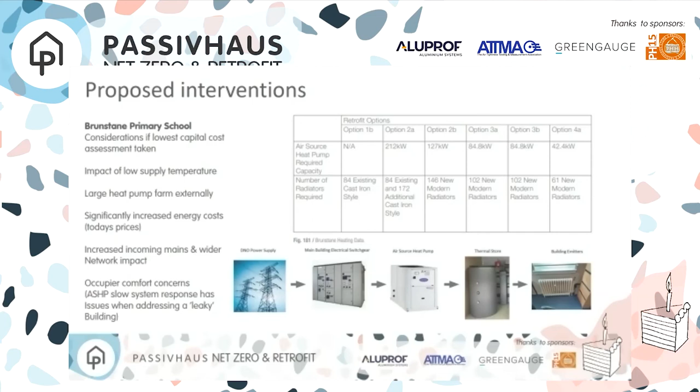And if the local grid's at capacity, we really have a responsibility to try and address that. The other important part of this is we can go off as experts and create lots of modelling scenarios and enabling information to hopefully lead to policy change. But there are clients out there actually willing to make change themselves. So how do we tap into those clients' decision-making process?

We met with Edinburgh Council once a week for an hour, every week for 14 months, apart from Christmas, where they were on the journey with us on this study. It was a really interesting way of developing, with significant scope creep as you can imagine, a study around how these priorities sit in a client's mind, especially a multi-bodied client like a local authority.

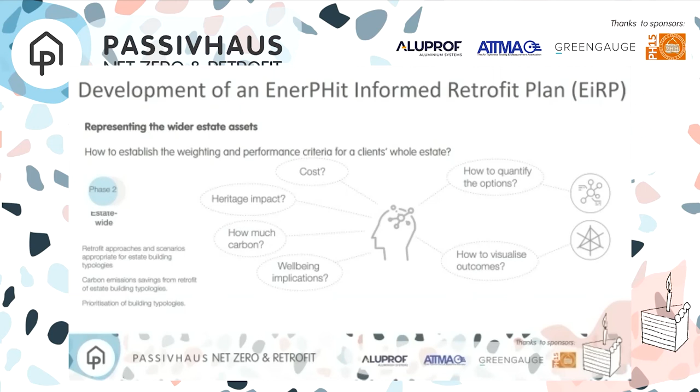So operational capital costs, the heritage impacts, and where they might be more lenient around heritage, and operational embodied and whole life carbon, wellbeing and health in a post-COVID world. That was a massive area to take on, and how to quantify and visualize those outcomes.

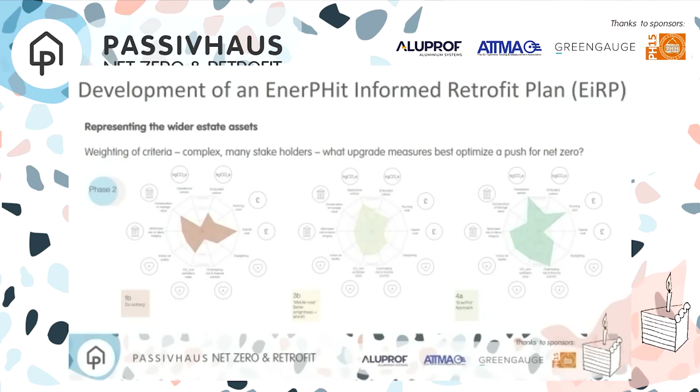We went through a series of assessments to work out how they could create those outcomes, and we established a total performance index with them around their main brief criteria that were really important to them, weighted against factors like cost, carbon, health and wellbeing, and heritage value, so they could extrapolate that to their estate as an initial benchmark for making significant decisions about energy and where they invest their money.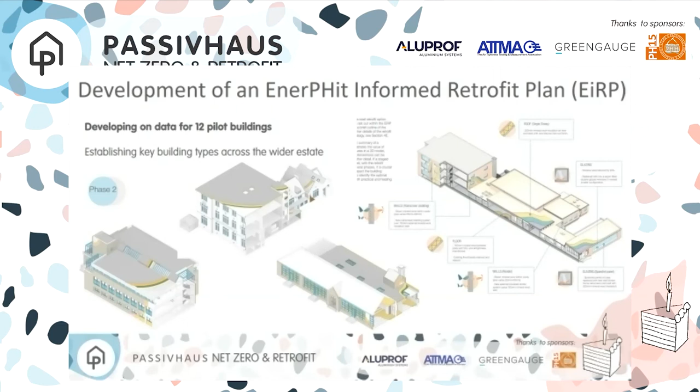We continued with the series of 12 buildings part of the study, and worked with Currie & Brown alongside to look at cost analysis. They extracted the cost analysis to hypothetically complete the retrofit for these 300 buildings over the next 10 years, because Edinburgh worked out they could do that if they have 6 providers of deep retrofit experience, rolling out one school a year. I don't know how those providers will cope with that, but over a 10-year period on their framework they could just about manage it.

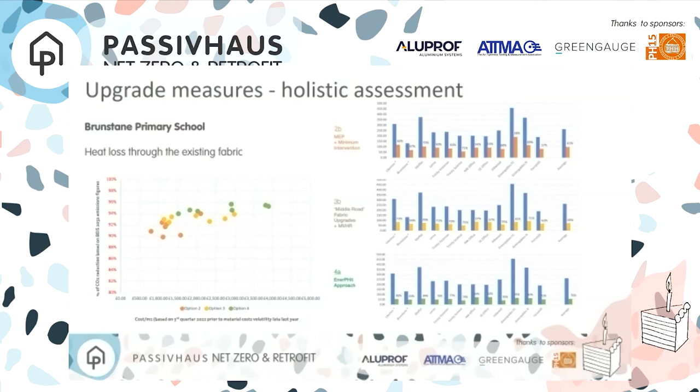It was interesting to look at the basic option versus the almost AECB retrofit option versus trying our best to get to full retrofit. We had about a 61% improvement overall, and that varies according to building type. The building characteristics and non-domestic design are so significant on the energy measures that we have to look at it from a boundary and energy point of view beyond the building.

None of this study looked at offsetting. We looked at future emission factors, so we didn't look at the 2050 carbon factor - we took a profile between now and 2032 from the BEIS emission factors, and projected some support through changing from a heat pump, but not relying 100% on it, because we have to be pragmatic that we need to combine the two into a blended option.

So 3 of those buildings are now instructed to go forward to be either Enerphit or just under Enerphit - the AECB retrofit standard - which is really amazing. The other 9 are likely to go out onto a framework to get delivered by others.

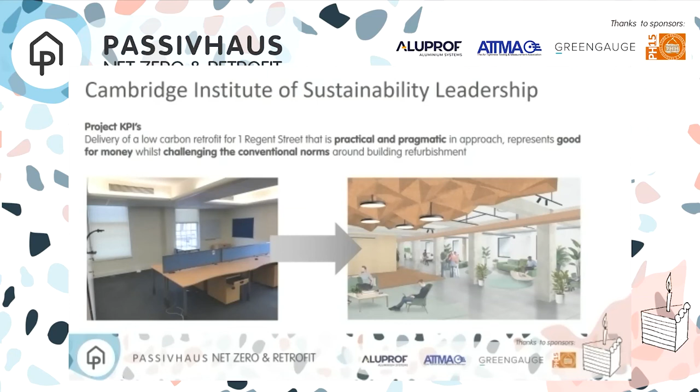Just an example of a completed building to wrap up - the Cambridge Institute of Sustainability Leadership is just going through commissioning at the minute. Gwilym will probably tell you more about that and the delivery side right now. But briefly, to touch on where we got to with that in terms of a really ambitious client - we need to start supporting these clients and enabling them to make some of these decisions to go for these types of building delivery.

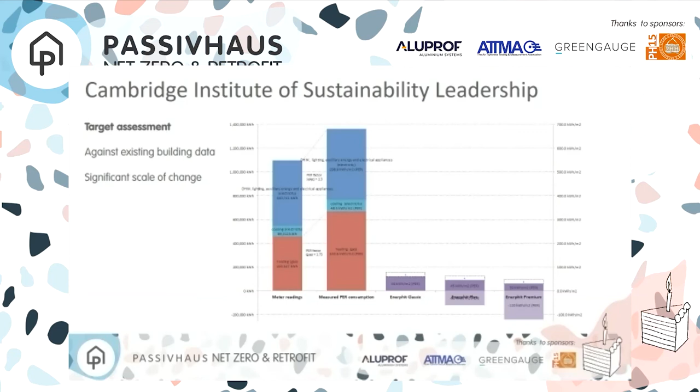The target set in terms of Enerphit Classic was so significant compared to where the measured meter data was in this building - it was an 88% reduction. There was lots of complexity in the building; it was an internally retrofitted project, and the dormers were an absolute nightmare to detail, with various other significant lessons learned at that scheme as well.

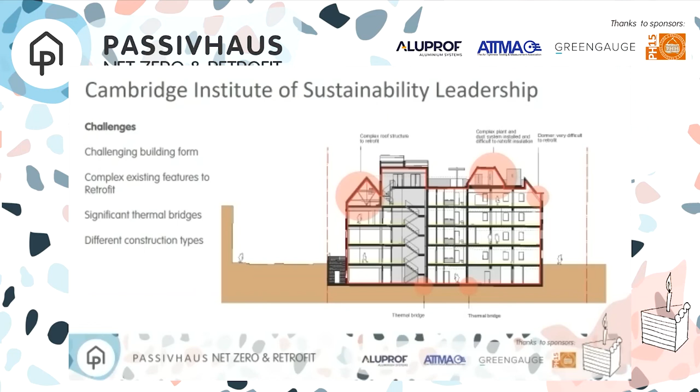To wrap up on heritage impact, we consulted with and successfully convinced planners to consider how we can make heritage buildings, past and current, fit for purpose for the next 100 years. And actually, this may not be appropriate for the next 100 years if we're really considering true carbon reduction.

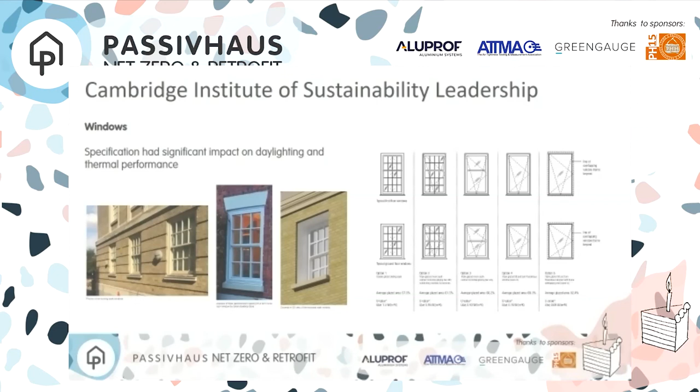It bettered our heat demand and created better daylight factor. The jury's out on whether you think that significantly harmed the look of the building, but the proportions and the kind of dialogue is the same. At some point in the past, those window sashes were probably painted black, so there was a solid-void legacy for this building historically, rather than just the white timbered sashes.

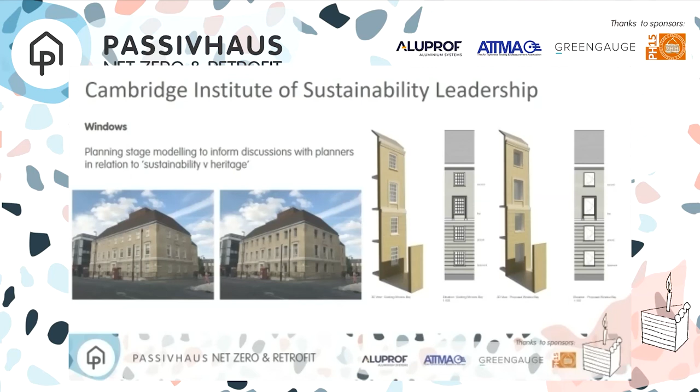In summary, it's really useful to underpin studies like this with Passivhaus and the EnerPHit approach. We need to be looking at accurately calculating consumption, especially in the non-domestic sector, since so much work has been done in the domestic sector. We need to focus on this, especially with local authority clients, to create a no-regrets approach. Addressing the fabric has to be possible and applied in all of these scenarios, and there are various infrastructural impacts beyond the building boundary if we don't do that.

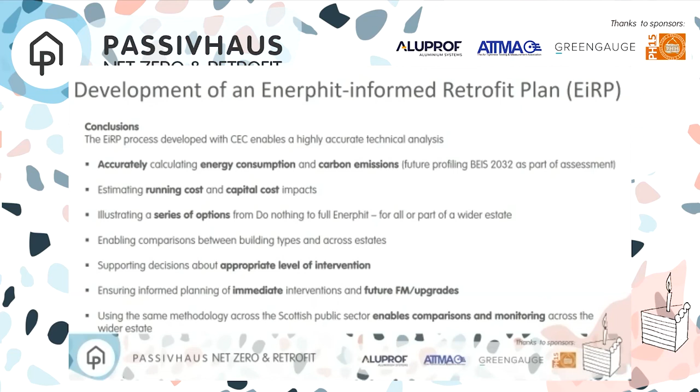It's about getting clients to understand that, enabling us to create and enhance comfort in these buildings, which I think is really important. Regardless of the heating technology deployed, we need to create buildings that become an enhanced sustainable asset at source. Even though in this study we've relied a little on decarbonisation of the grid, we need to prove the buildings can withstand any trends that come out of this, and also look beyond heat pumps to other exciting things out there.

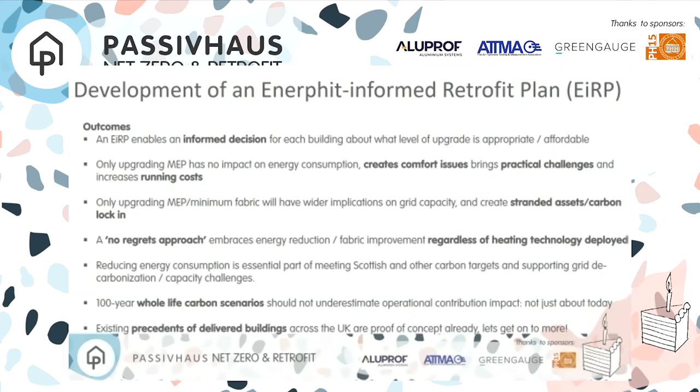Like phase change materials. And the study is ongoing, really, to now update it to current carbon emission factors and current costs of energy and construction. There you go.

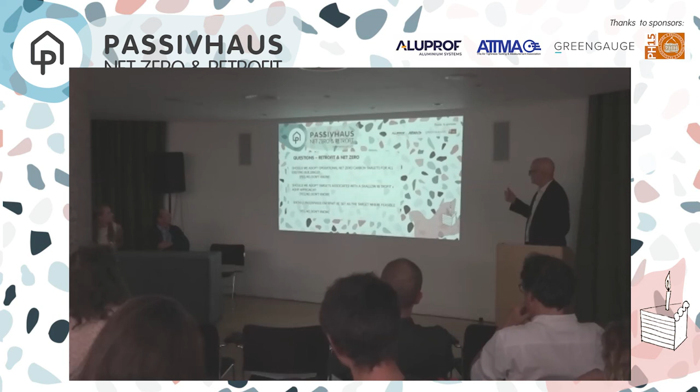Should we adopt operational net zero carbon targets for all existing buildings? And I'm using the LETI net zero carbon definition for operation.

Operational net zero is the LETI definition. It was on a slide, but we've lost that. Anyway, it doesn't allow for offsetting. It allows you to have on-site or off-site renewables directly relevant to and allocated to that site, but no offsetting of carbon emissions to, say, tree planting in Africa. So that's what it allows for.

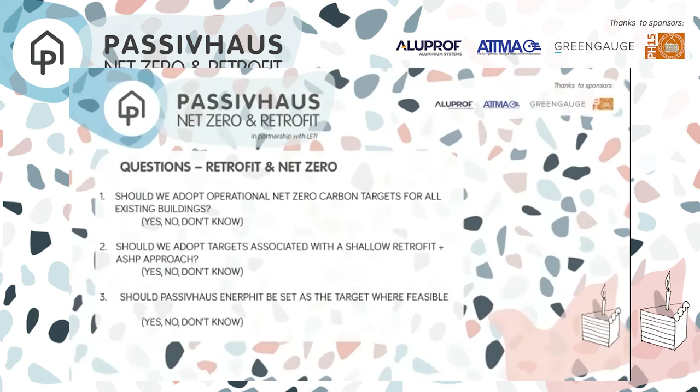Second question: should we adopt targets? The word shallow is the problem here, isn't it? Should we adopt targets associated with a shallow retrofit plus a heat pump approach? I'm going to take off air source and just say it's a heat pump approach plus shallow retrofit. What does shallow mean? That's why I don't like it.

And then finally, should Passivhaus EnerPHit be set as a target where feasible? Should we aim for that for all the broader benefits where feasible? But the problem is the word feasible, isn't it? Anyway, we're going to vote on them because it's a summer event. It's just a bit of fun, and then we're going to go and argue about it over drinks.

So question 1, operational net zero carbon targets for, last clarification: I'm going to allow you to say nearly all. The exemption I'll allow is for, say, protected heritage buildings. So nearly all existing buildings, excepting those, and we might argue they should be in, but exempting those for the moment - that's the wording I'll go for, nearly all.

So those who say yes to that question, should we have operational net zero for nearly all existing buildings? Yeses, please put your hand up. Okay, I think that's 50 to 60%. And again, we've got a complete split between the halves of the room. So 60% yes. Who's no? Okay, only 2 no's. That's interesting.

And don't know? Yeah, keep your hands up for don't know. Okay, so that's about 15 people, that's 20%. Laura, what have you got online? Well, it's maybe a bit more balanced online - 27% say no, a bit over half say yes, and 21% undecided. I think that's very similar to the room, but you can see the problem with the questions until we've got much more knowledge and specificity.